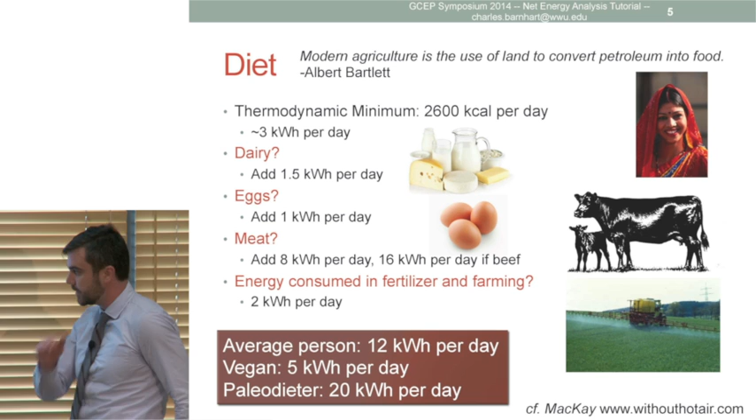That's a fair point. Energy consumed in fertilizing and farming is 2 kilowatt hours per day. That's the energy associated with the fertilizer and driving these vehicles around. And so if we look at the differences between a paleo dieter and a vegan, average person consumes 12 kilowatt hours per day. Vegan, at minimum, consumes 5 kilowatt hours per day. And a paleo dieter probably consumes somewhere around 20 kilowatt hours per day.

So for the paleo, are you still using the US numbers? I don't know what you mean by that question. The average vehicle miles are US. These food numbers are probably for an average developed country diet.

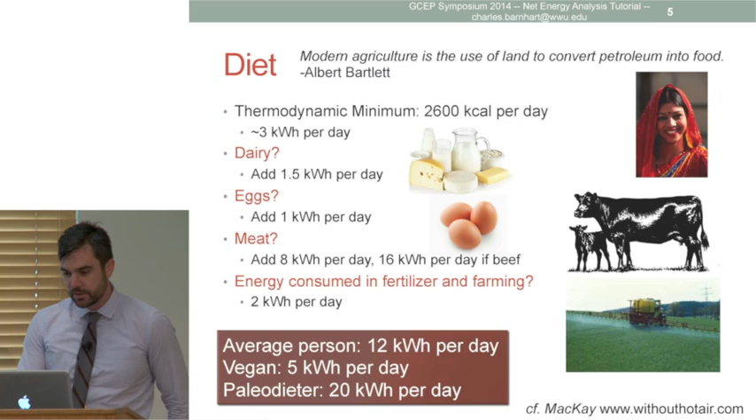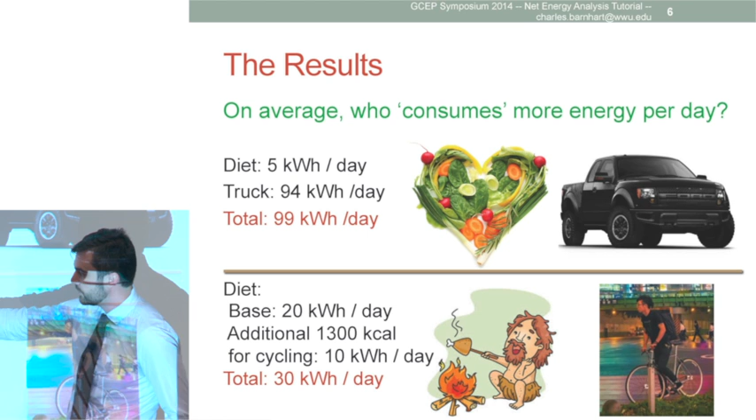All right, so here are the results. Diet for the vegan Raptor driver is 5 kilowatt hours per day. The truck consumes 94 kilowatt hours per day for a total of 99 kilowatt hours per day. The cyclist base for 2,600 calories consumes 20 kilowatt hours per day, but this individual is probably consuming an additional 1,300 calories per day to ride their bike. And so they need to consume more food energy, add another 10.

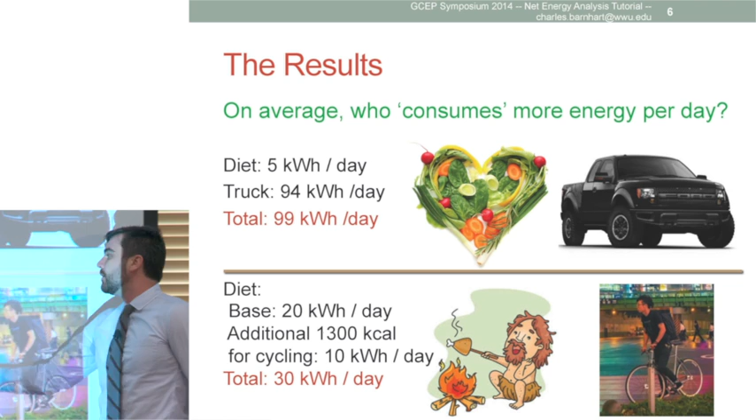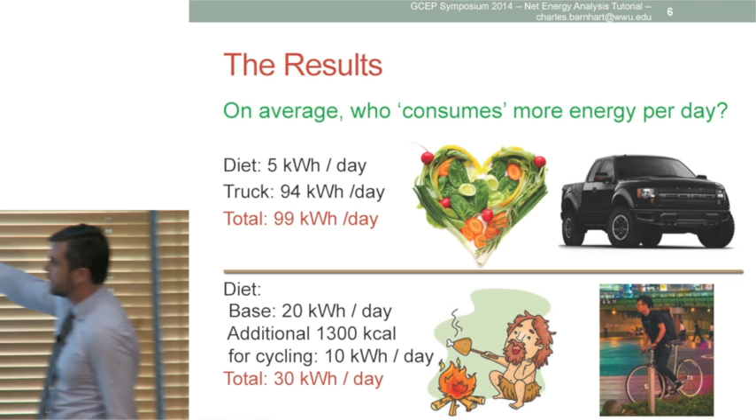Conclusion is the vegan with the Raptor probably consumes on a daily average basis more energy than the paleo diet cyclist. But these numbers are actually kind of close, and it is still in the maybe range, especially given all the caveats associated with life cycle assessment. But if I were to place my chips, I would definitely put it on this truck as consuming more energy than the energy associated with food.

Incidentally, you take one international flight a year, and you divide that through the 365 days, that's about 30 kilowatt hours per day. You take 2 international flights, and it's starting to wash over whatever car you drive. So you may be holier than thou and drive a very fuel efficient car, but be careful on how much you fly if you want to wear your Green Earth badge. I think a lot of people really need to consider that. Yeah.

All right, so we looked at transportation, we looked at diet. I want you to share with your neighbor and think about how else do we consume energy. So go ahead, break it up. I can take a break. Anybody want to share some ideas? Yeah. Go ahead. Yeah, I just want to hear some other ways we use energy besides transportation and food. Yeah. All right.

So my struggle with this one is, if I have money and I don't spend it on electricity or Hummers or cars or something, where does the money go? Most likely, my wife spends it on Amazon. Okay? So the carbon footprint of that money is more or less the same as what I would have spent on my electric bill or my car. And if I leave it in the bank, somebody else is going to spend it. Now it's a question of the velocity of money. How many times that money circulates through the economy? There's obviously the only way to be righteous about this is to be poor. That's it. Tutorial over. No, go ahead.

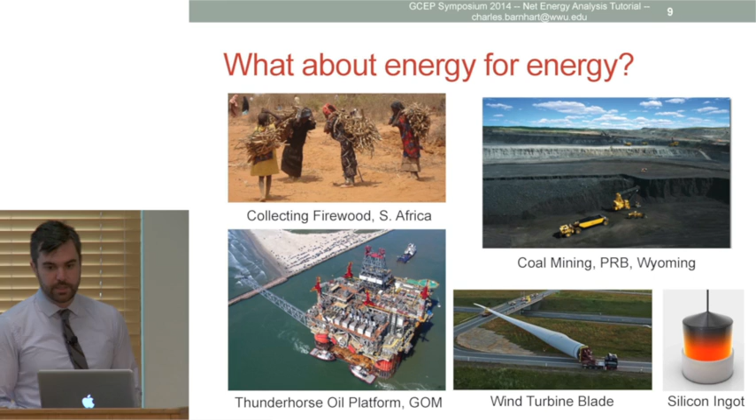It also takes energy to get energy in advanced industrial energy systems as well. So here are massive dragline operators mining coal in the Powder River Basin in Wyoming. This Thunderhorse oil platform is, I believe, the biggest oil platform in the world, and it is the size of a city. Here are a bunch of cars at the beach for scale. Wind turbine blades are massive and made out of fancy materials, and solar panels are made out of molten silicon, which is an energy-intensive process.

So this gets us to start thinking about what good is an energy system, what's good about it. Aristotle thought about what makes something good a long time ago. In the classic Philosophy 101 translation of Aristotle's functional argument, a hammer, a good hammer, is a hammer that drives in nails straight and true. And so a good energy system might be an energy system that delivers more energy to society than it costs society. And so that is the basis for net energy analysis. It's concerned with how much energy it takes to deliver energy back to society.

Some of the earliest thinking in this in a more formal sense, obviously humans have been thinking about net energy analysis on a daily basis since their existence. But in a more formal sense, Charlie Hall back in 1972 was thinking about the migration of different species, birds, reptiles, and fish. And he was wondering why fish in local streams on the East Coast were going up and down depending on different times of the year, and also depending on the size of the fish. And I'm not talking about salmon migration out to sea and then back to the stream. This is just within an individual stream.

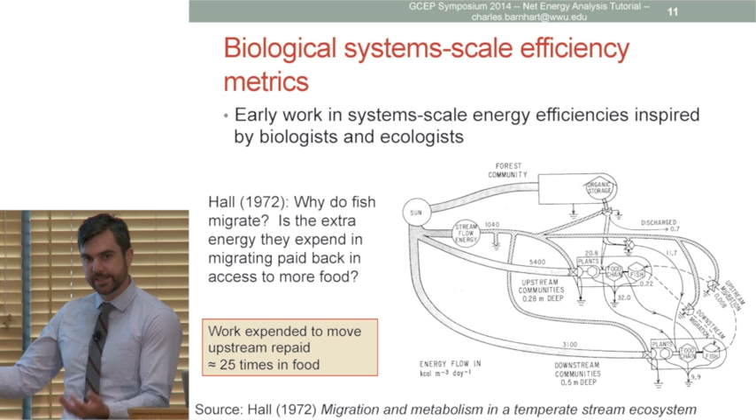So at certain times of the year, the fish would swim several kilometers upstream and hang out there for a while, and then later on swim several kilometers downstream. And he looked at several different hypotheses for why they would do this, predation, that sort of thing. And he determined that it's because depending on the season, the fish can get much more energy in different locations. And they end up getting 25 times more energy in food than they spent in all that swimming back and forth, especially upstream. So they can swim upstream, burn a bunch of calories doing that, but then they get repaid 25 times in food. And so the energy return for those fish is a factor of 25.

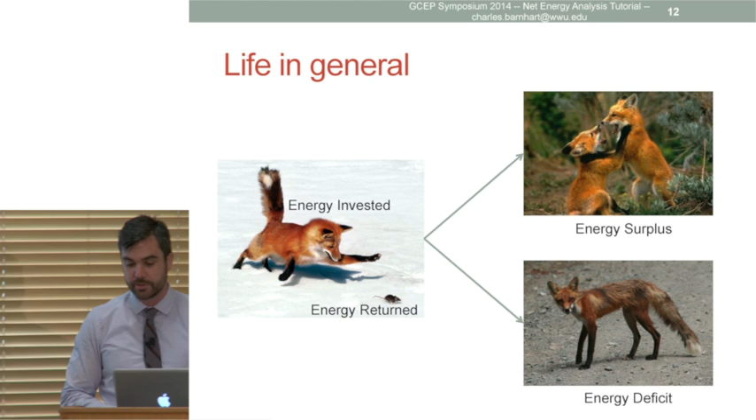Life in general is incredibly familiar with this. I mean, life is thermodynamically just a dissipative structure. We degrade energy gradients and create entropy. And to be able to continue to do that, we must acquire more energy than we consume. And so here's an Arctic fox spending energy, investing energy, trying to catch some energy. And if the fox gets more energy from the food than it spent trying to catch it, then it leads to great things in fox society like puppies. And if it spends more energy trying to catch the food than it gets from the food, then it leads to not so great things.

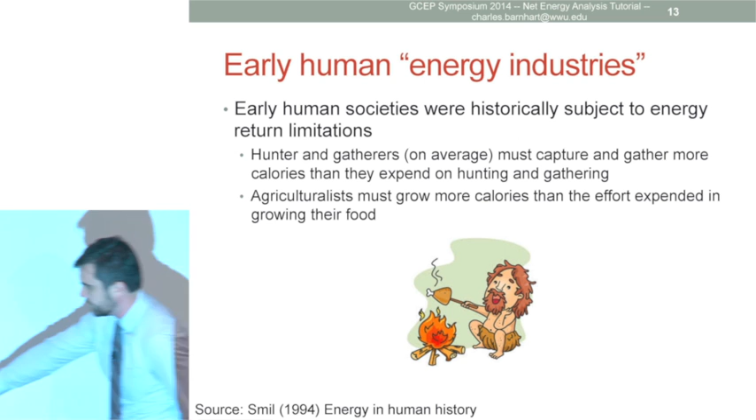All right, so I've talked a little bit about gathering firewood, but this is very familiar to energy use throughout human history. There's a really excellent book by Vaclav Smil called Energy in Human History. But in general, early human societies were subject to energy return limitations. Hunters and gatherers needed to maintain territories and capture more food calories than they expended going about that territory. There is an energy revolution. The first one was the use of agriculture. And so now we were able to grow even more calories than the effort expended in tilling those fields, because we begin to harvest solar energy in a sense.

I'm going to switch gears for a moment here. I know that there are a lot of business people in the audience, and so I wanted to shift away from physics momentarily and think about financial analysis and how it's actually guiding this net energy analysis. So here are some very basic concepts in financial analysis that even I barely understand. You have to invest money to make money. To be profitable, you need to make more money than you invest. Investments with high rates of return are better than investments with low rates of return. Investments that are profitable have a shorter break-even time, and they're easier to grow quickly. And so net energy analysis is applying these concepts.

And so in terms of net energy analysis, it takes energy to operate and decommission devices and systems needed to produce energy. For a device or system to be useful to the global energy system, not on some microscopic or local level, but globally, energy systems must produce more energy than they require for their manufacture and operation. And if this is the case, then they can bootstrap and grow, because this windmill will produce more energy than it took to build it, so you can use some of that excess energy, net energy, to build another windmill, and it can continue to take off.

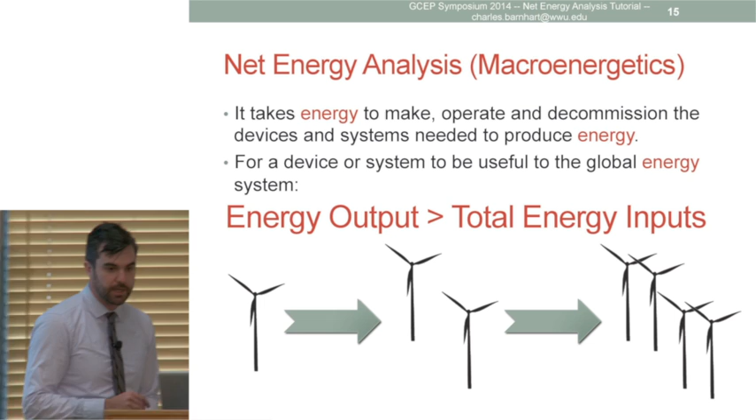Some general insights from net energy analysis. A primary energy resource must provide more energy to society than it consumes. Energy resources that do not meet this criterion are either subsidized by other energy industries or are uneconomic. So what does that mean, subsidized by other energy industries?

It wasn't last winter, but the winter before, in Nome, Alaska, there was a heating oil crisis. They got locked in by ice, and the delivery wasn't made before that ice reached there. And the United States employed a Russian icebreaker that was powered by 2 nuclear fission reactors. The amount of energy associated with obtaining that raw uranium, spinning it up, and then operating a fission reactor that's moving a massive boat at really slow speeds as it breaks through the ice to deliver some heating oil to a small village in northern Alaska.

The energy return on energy invested for that, the amount of energy contained in that oil compared to the amount of energy in that boat, it's probably far smaller. So their energy return was not a factor of 25 like for the salmon. It was probably like a factor of 1 over 1,000. So that is not a way to run a global energy system, but in that specific instant, that energy was precious. And so there are instances where poor energy returns make a lot of sense because humans are important.

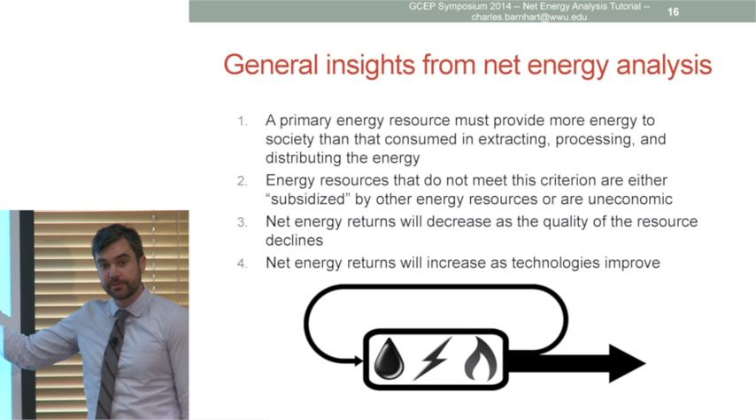What else? Here's some interesting insights that I think begin to unlock the power of net energy analysis. As resource quality declines, so does net energy availability.

Yes? I have a question about actual quality of the energy itself. It seems like the net balance could be negative if you're turning poor quality energy into higher quality usable energy. Yeah, energy quality is certainly important, and that's something that we keep careful track of in some of these later analyses that we are doing. Some of the early analyses just called a joule a joule, but as you will know, an electric joule or pure work joule is much more valuable and useful than some joules associated with a hot cup of coffee, for example. You can't run your computer on a hot cup of coffee.

All right, so I know it's gotten a little lecture-y and not as fun, but we are getting through some of these basic concepts with net energy. So the Industrial Revolution was fueled by easily accessible and cheap, abundant fossil fuels. This allowed for a rapid and large payback, and it led to something called the upward growth spiral. So there's so much net energy and excess energy associated with mining coal and then later oil that we could build these industries very rapidly, mine more coal, explore more oil, and the available net energy to society continued to outpace the energy required to supply energy to society. And so societal energy use went exponential in the last 200 years.

And historically, this energy sector has required very low energy investments, about 10% of the gross production. As we transition to renewables, or as oil resources become further degraded, this fractional investment will likely increase. This is represented in a cartoon here. So here's the energy sector, and it's pumping energy into society, but it requires some energy to maintain the sector or to grow it. And as these ratios change, depending on energy resource quality and technologies available, it has dramatic implications for societal economies.

All right, this is the most boring slide, but I have to pay respect to some of the people that did net energy analysis before I did. Namely, Peet in 1992 defined net energy very academically and said net energy analysis is a determination of the amount of primary energy, so that alludes to energy quality, direct and indirect, that is dissipated in producing a good or service and delivering it to the market.

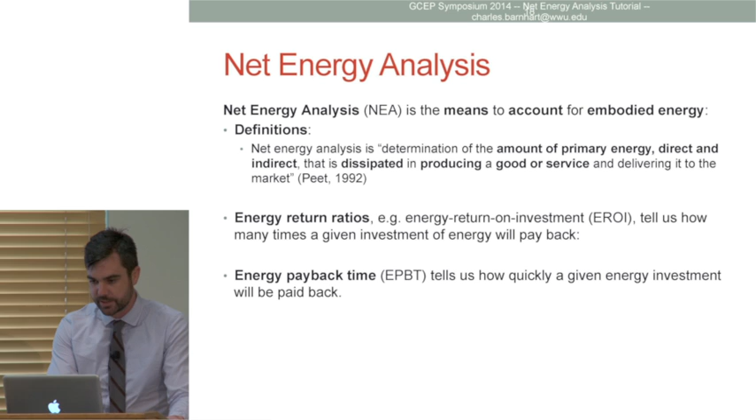The most commonly used metrics in net energy analysis are these energy return ratios. And so this looks at energy inputs, energy outputs. Sometimes this is time-based. They look at how these change over time. And that leads to another common energy return ratio, which is the energy payback time. It tells you how quickly a given energy investment will pay back its initial investment. So somebody asked about solar panels earlier. So this is a concern with paying back the energy required to manufacture a solar panel. So let's look at some of these returns.

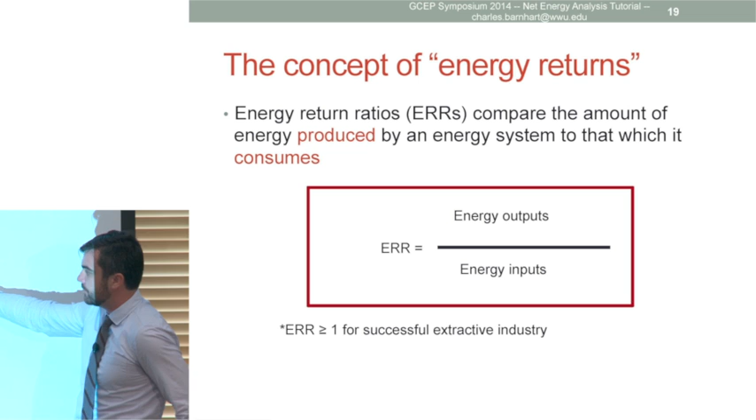So here's an energy return ratio, compares the amount of energy produced by a system to that which it consumes. So add up all the energy outputs and divide it by all the energy inputs as they're added up. And then basic concept, if this number is greater than 1, then that's a successful energy industry in a global sense.

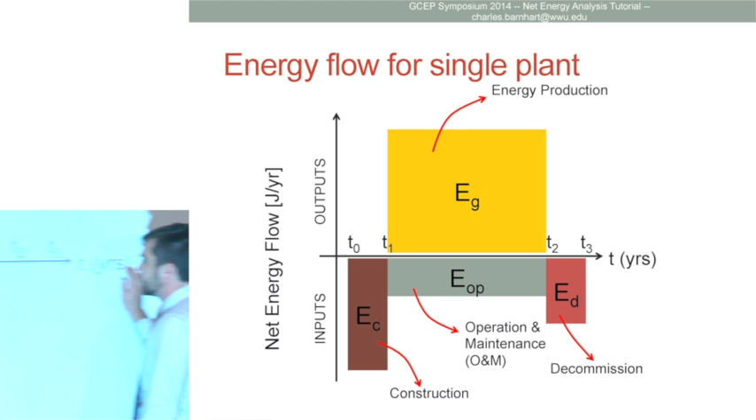So let's look at a single plant. We could call this a coal plant or a natural gas turbine, and that's where I'm drawing the boundaries, at the plant. Has energy inputs in construction. And so this is energy flows, so inputs and outputs, and this is a time axis here. So at the beginning of the plant's life, there's a big energy sink in building the plant.

While the plant's being operated, there's some energy associated with operating the plant, perhaps fueling it with coal or natural gas, and then it's generating energy to society. So that's energy production. And then at the end of life, there's energy associated with decommissioning and recycling the plant. And so the most common net energy analysis ratio found is this energy.

Yes, a question. I submit that your analysis isn't deep enough. Because in this whole discussion, we're assuming for a coal plant, for example, that the oxygen is free. Okay, and one of the outputs of the plant is CO2. Sure. Okay, and that's not reflected in this equation at all. And the problem is right now we're paying for the CO2, and we're going to continue to pay for this.

Yeah, so you're starting to get into external energy ratios or Earth system energy ratios. A complete analysis that includes all energy inputs, not just paid by society, but paid by planet Earth or the solar system or the entire universe, is always going to be less than 1. Well, yeah, so then we're starting to place an energy value on the oxygen and CO2. And that's certainly needed. These externalities need to be considered.

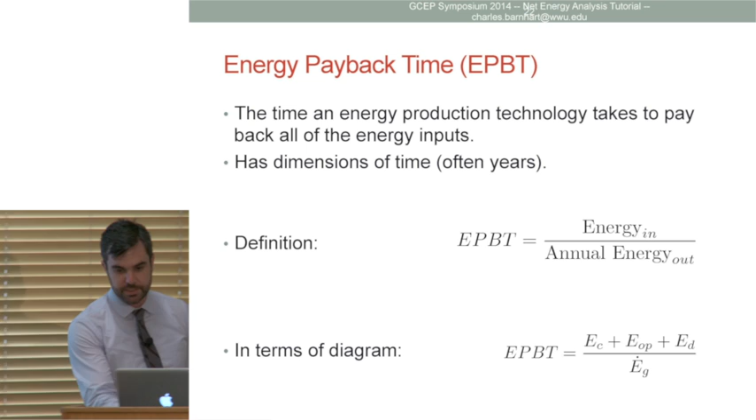So looking at a coal plant here, and this is from White and Kulcinski. So this isn't actually looking at the fuel inputs, it's just looking at the operational costs of the plant. Here are the energy inputs for construction, operation, and decommissioning. And here's the energy generated over time. Here, the construction is 150 terajoules, operation is 83 petajoules, decommissioning is 20 terajoules.

So we can first look at the energy return on energy invested for this plant. And so we put in the energy generated on the top and all the energy inputs on the bottom. So we can plug those numbers in. Does anybody catch a math error with this equation? Yeah, somebody said it, petajoules and terajoules. So in energy analysis, it's really important to pay attention to units.

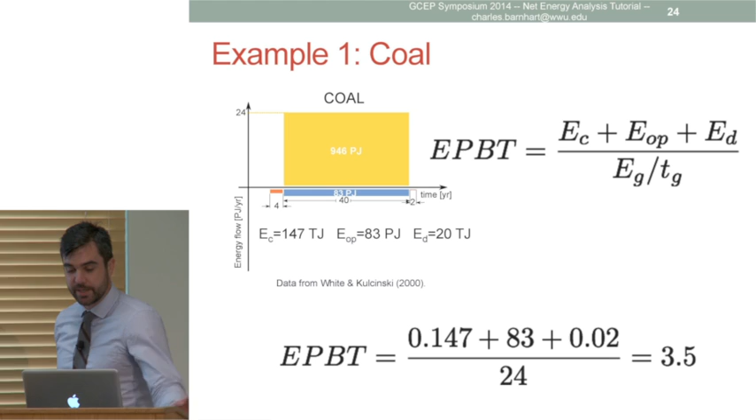In general, you guys have already alluded to this with energy quality. That's an even deeper dive into what units mean. But in basic terms, I've confused petajoules and terajoules here. And so we can correct for that. And the EROI for this particular coal plant is 11 to 1. In terms of energy payback time, take the energy inputs and divide it by the energy generated per year, and it has an energy payback time of 3.5 years.

So in general, non-renewable technologies have large operating and maintenance costs associated with the fuel cycle. Renewable technologies often have large upfront costs and minimal operational costs.

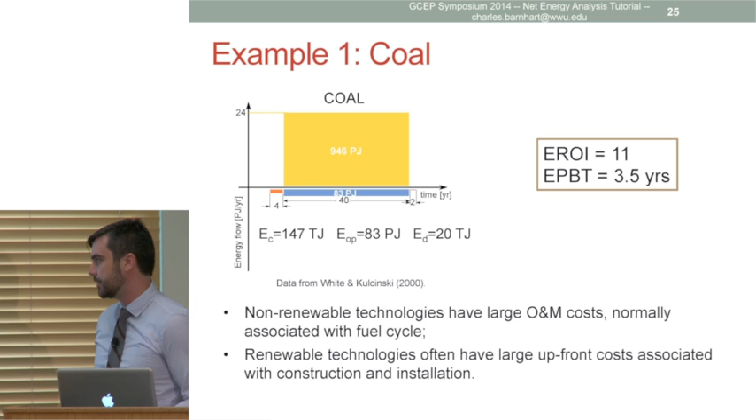The fossil fuel technologies are often described as pay-as-you-go, and the renewable technologies are pay-up-front. All right, that was a lot of lecture, so let's break it up a little bit. And just in terms of societal energy costs as determined by economists today, I want you to take a vote on which resource on average today has the highest energy return on energy invested. We can go back to that website, I hope.

On average over what time period? Today. So I'm not talking about oil gushing out of the ground in the 30s. I'm talking about oil today, coal today, solar today. Solar post-2000, that's where the data is coming from. Wind post-2000.

Yeah, so again, this is who you send the message to, and this is the message. Yeah, so we're starting to get some maybes. We're starting to get some distribution in the results. Does anybody have an idea why solar PV might not have as many votes as some of the other technologies? It's just energy intensive to make. Yeah, it takes a lot of energy to melt those silicon wafers.

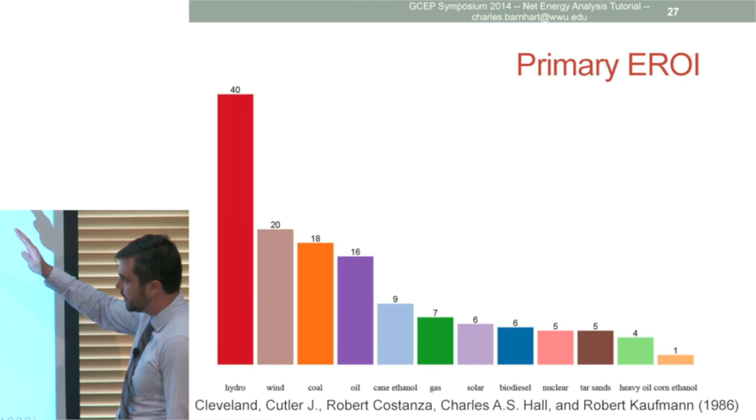All right, so this looks pretty good. We have a good distribution, some high votes for oil, natural gas, and wind. One more for natural gas. So natural gas is actually an interesting thing because the energy associated with natural gas production's changed dramatically in the last 10 years with the advent of horizontal drilling and fracking, and so these numbers aren't reflected as well in this plot, which comes from previous work back in 1986. But hydro wasn't on that chart. But in general, wind, coal, and oil are very high, and solar is lower than wind by a fair bit. I have some updated numbers on solar, wind, and gas that I'll display later.

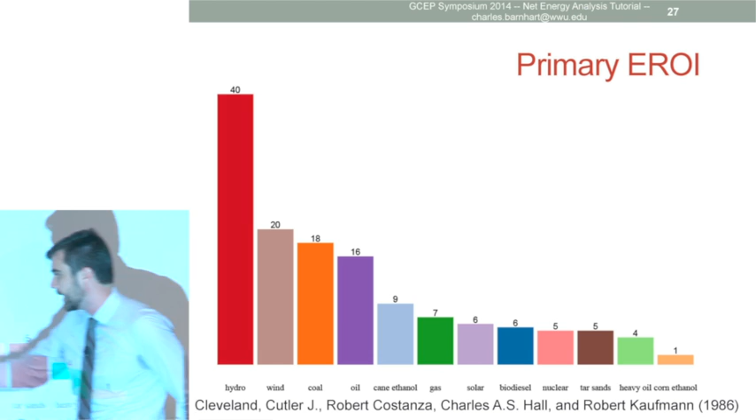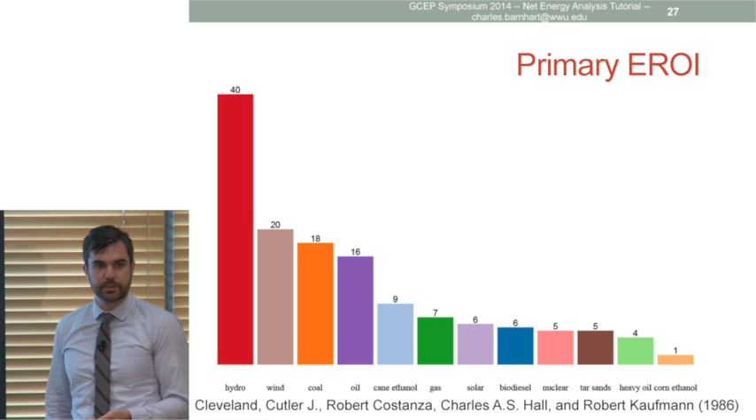Corn ethanol, depending on where it's grown, can sometimes be below 1. Yeah. Hydro performs so well because it has a huge upfront energetic cost to build the dam, but then it just runs for 100 years and continues to pay energy back.

All right, so we've already explored a lot of this, but just in case we're not all on the same page, I want you to share with one another. Yeah, go ahead before we do this. The analysis you did, like the example of the coal plant for the energy return on investment, I think you mentioned that the coal used to feed the plant is not considered in that calculation. Is that correct? No, it wasn't. This is like comparing a solar power plant to a coal-fired power plant based on EROI. It doesn't make sense to me because on one hand you're feeding something, a bunch of coal pulled out of the ground, and on the other hand you're just sitting outside on a sunny day.

So the energy associated with pulling the coal out of the ground was included. The energy contained in the coal was not included. But this is certainly getting into some of the issues and problems associated with this. It really depends on where the boundaries are being drawn, and it's difficult to think of how to compare something like a coal-powered plant to a solar-powered plant. And so one metric that I think is useful is the net external energy ratio, which only looks at energy subsidies paid by society, energy paid by society to acquire these different resources.

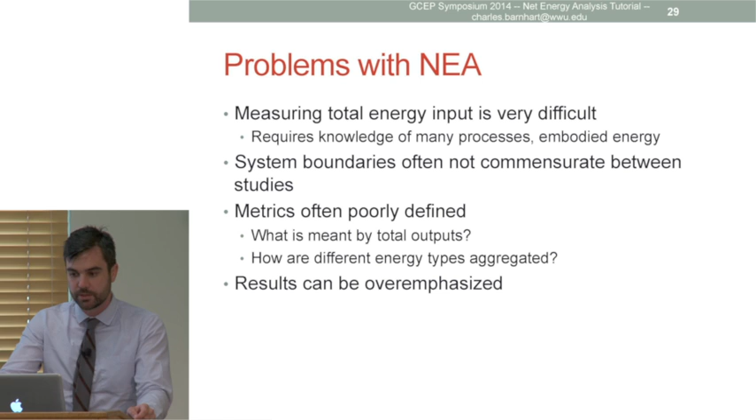I saw someone with their hand up. Yes? Do you use a discount factor for calculating? No, energy is conserved. I don't like that idea. But some people are definitely interested in that. But personally, I get really queasy when we talk about less energy in the future because there's always the same amount of energy. Exergy, you could talk about discounting exergy.

All right, so these definitions are really simple, right? Just an equation with a few numbers in it. It's 4th grade mathematics, but the implementation and execution of net energy analysis is very complicated, as we're beginning to discover. It's easy to talk about. It's difficult to actually collect the data and perform the math. Energy products are produced in very complex pathways. I mean, we're talking about truckers and Snicker bars.

Indirect energy consumption can occur in many different industries. How much energy does it take to make a PhD to seismically analyze an oil reservoir? Do we have to include all the energy it took to train that geophysicist? And so Adam Brandt here at Stanford, McDale at Clemson, and myself are trying to standardize some of these methodologies, but right now it is a bit of a hornet's nest. We have something like 20 different operational definitions in one paper.

Matt Pellow, a postdoc at GCEP, is looking at energy analysis associated with fuel cells, which are really complicated because is it an energy generation technology? Is it a storage technology? Is it a consuming technology? So it's a complex thing, but we are working on it, and I think it has a lot of promise and can really add to policy debate in the future when we're looking at carbon costs, water costs, energy costs, as well as financial costs. We're going to take a short break, and then we're going to look at 3 examples.

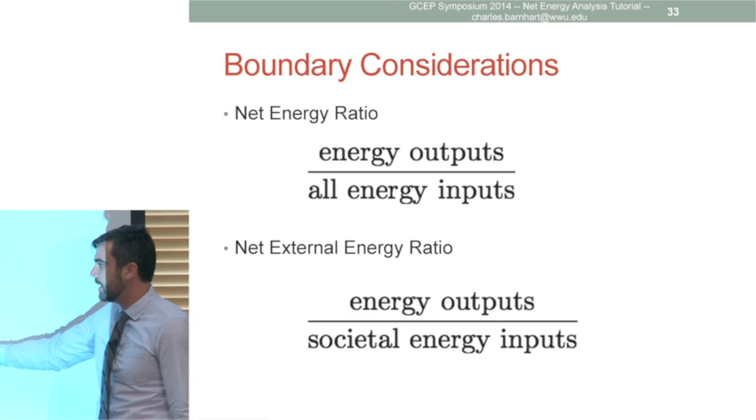This external energy ratio has more economic significance because it's asking how much energy was actually shipped to Alberta to produce these resources. Any guess which one is going to be bigger? Is all of the energy inputs going to be bigger or smaller than the societal energy inputs? So all the energy inputs are clearly going to be bigger because this is energy on site, which means this denominator is going to be bigger, which means this ratio should be smaller.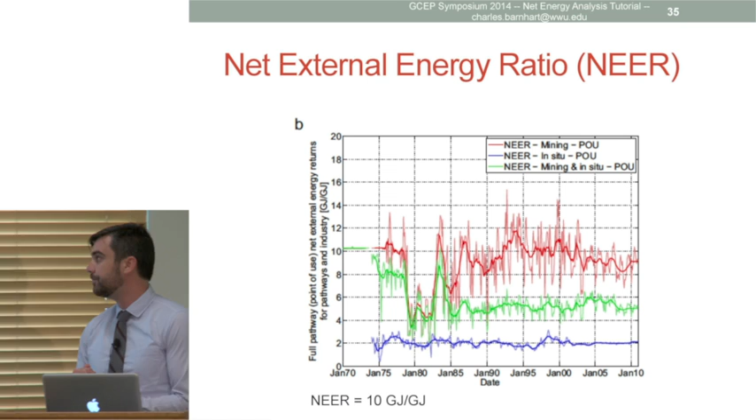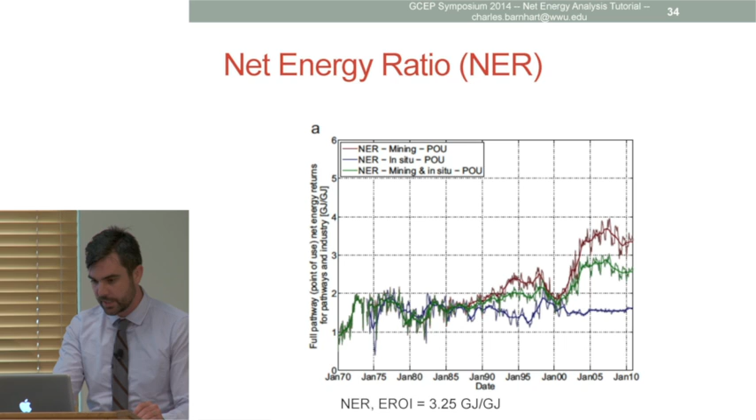But the EROI for these tar sands at point of use are about 3.25. If we look at their EROI with respect to cost to society, the net external energy ratio, then the EROI is about 10. And that's because it's consuming some energy on site. They did see slight improvements in this one as technologies and mining practices have improved. In the long run, these EROIs are expected to go down as the resource becomes depleted and less accessible. The low-hanging fruit gets picked. And it's getting really low with oil price depreciation happening in the last 2 weeks.

Here's the PV industry. So this analysis was done by Mick Dale. He's really interested in not just static EROI values, but how EROI changes with time, or more dynamic things. When industries are in a subsidy period or when they're in a producing period and how that transition happens. So these are all his words, and he states that amortized metrics such as cumulative energy demand, so that's the total energy spent in a particular technology pathway, may disguise the cost of rapid scale-up or the cost of transitioning from one energy source to another.

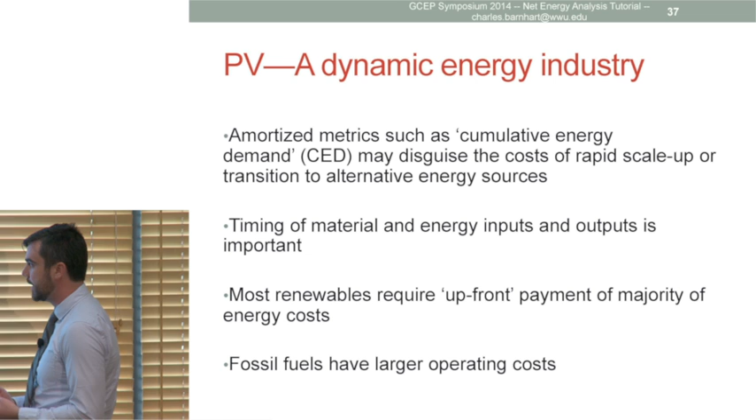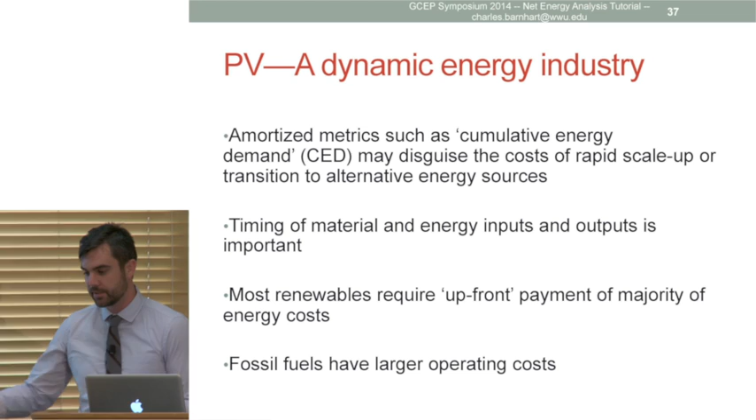The timing of material and energy inputs is important. So this is reflecting that pay-as-you-go model with fossil fuels versus the pay-up-front model with renewable resources. So to state that again, renewables require this upfront payment. All the energy and financial capital is paid at once, and then it pays its dividends over time, whereas fossil fuels, in an energetic sense, require less upfront energy costs, but then they require continued energy payments during their operation.

But you mentioned at the bottom, the fossil fuels have larger operating costs. That's very broad. These are Mick's words. I'm assuming he's talking about energy, larger operating energy costs. You have to forgive Mick and I, we're physicists, so when we talk about costs, we're usually talking about joules. But here I'm trying to separate this distinction, this problem with cost. So here is financial costs.

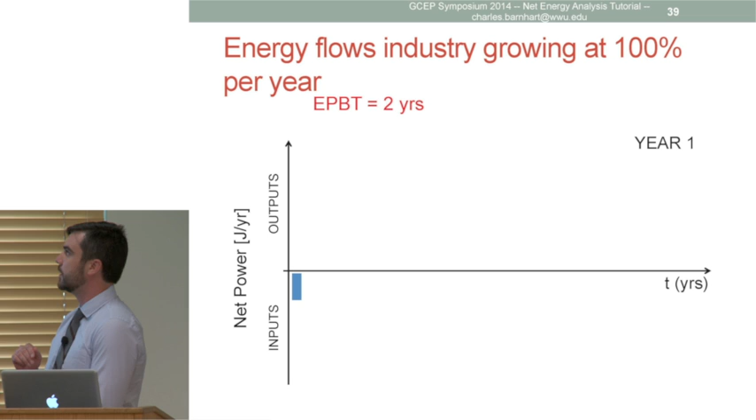So here, energy flows. So this is what Mick's getting at. He's not looking at the total EROI at the end of the day or 30 years down the road. He's concerned with dynamic EROI over time. And so he drew up this nice cartoon to show some of this. So this is the industry flows associated with a growing industry. This is just a cartoon. These aren't actual values yet. So your energy inputs on year one, some energy is paid by society to build a solar panel.

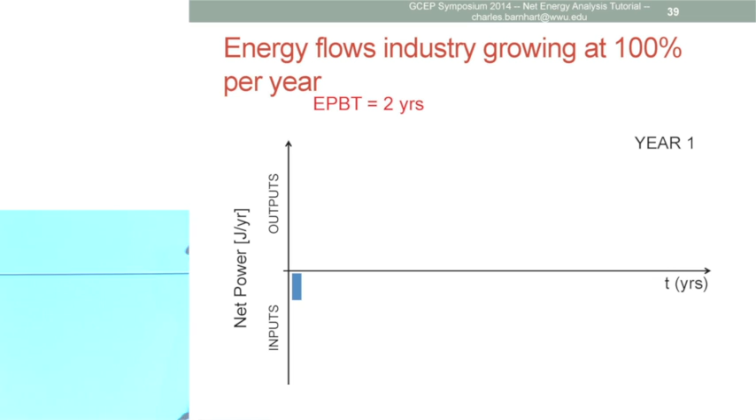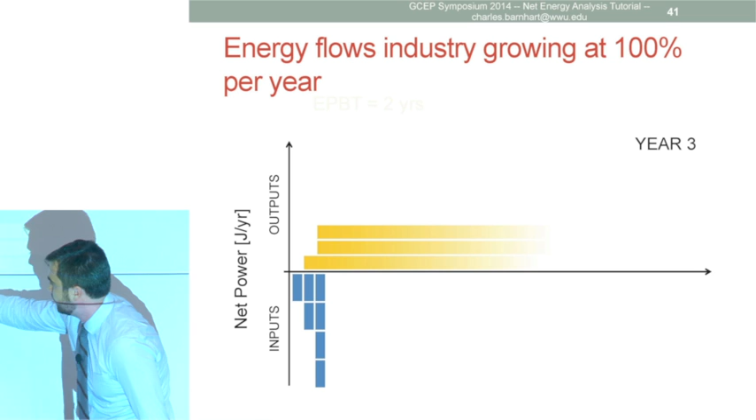Year two, an additional energy unit is paid. This first one is now starting to produce electricity. Year three, society decides to build two more solar panels. These first three here are now producing electricity. And so on.

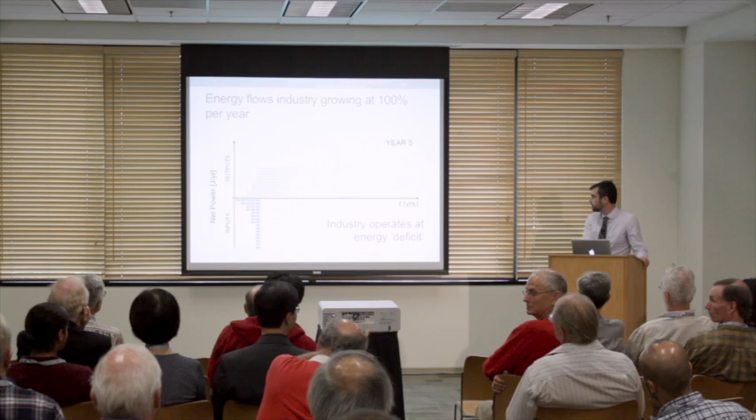And in this specific case, the industry is operating in a deficit. Each year, society is paying more energy out than it's getting back from those solar panels on a yearly basis. Just to clarify this, let's stop right there making any more investments and just use what we have. Wouldn't we get net return in a few time units?

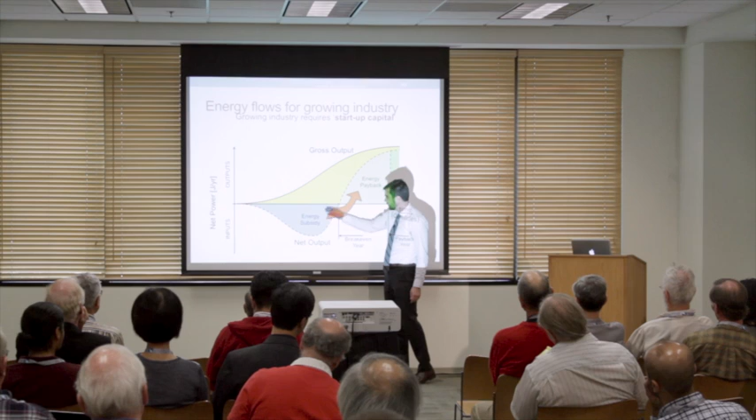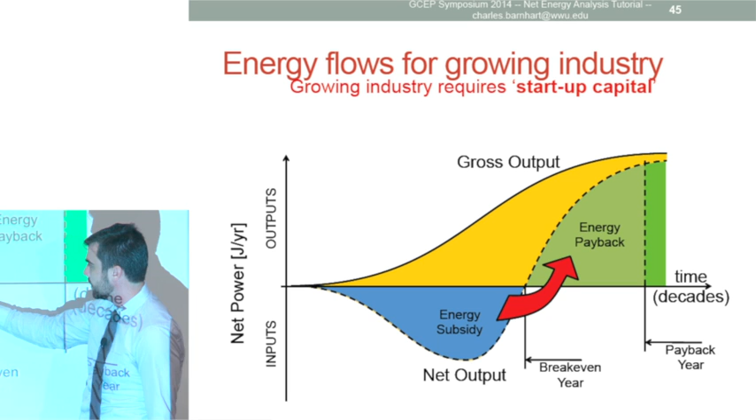Yep, that's exactly right. So at this point, society has decided to not invest any more energy, or to invest decreasing amounts of energy in a time derivative sense into the solar panel industry. But these ones that have been built all along are now generating electricity and will continue to do so. At some point, the amount of energy produced is going to equal the energy subsidy, and that's going to be this break-even year. And after that, we'll continue to pay energy back.

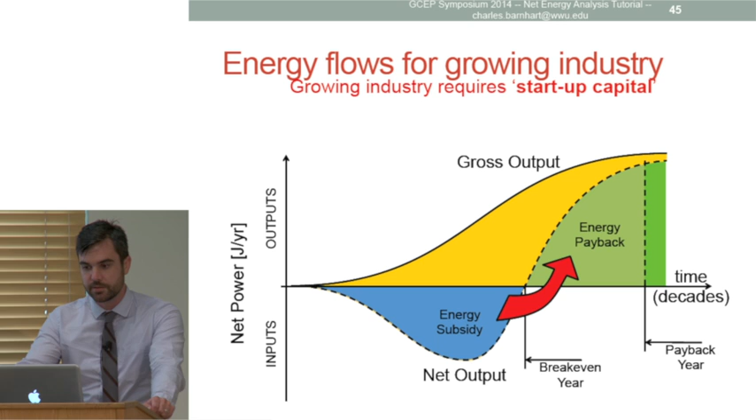The question with respect to the PV market is has it reached that break-even year? Or is society paying an energy deficit to provide energy to build the PV panels? And a related issue is that if you increase your PV penetration or any renewable beyond about 10%, you have to start worrying about issues of how you're going to integrate it. Yep, and you're going to increase your energy cost by building peaker plants and storage.

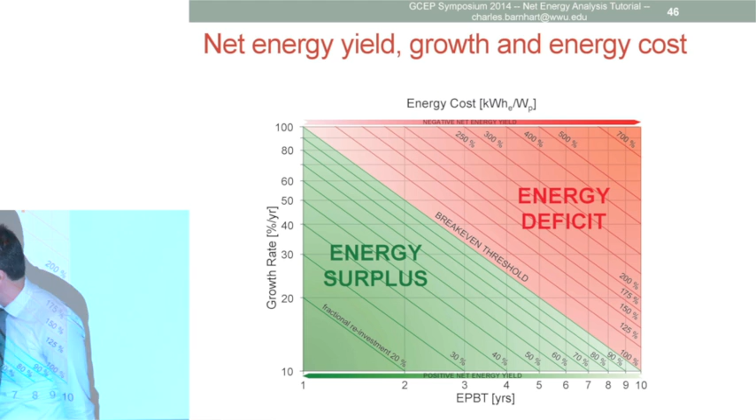We'll get to that. So here's the net energy yield growth and energy costs associated with the PV industry. This plot shows the growth rate of the industry on the y-axis, percent per year, and this x-axis shows the energy payback time in years. Energy payback time is linearly proportional with the energy cost in kilowatt hours per watt peak. And so to begin to plot technologies on this graph here, we need to have 3 different numbers. We need to know what the industry growth rate is, percent over time.

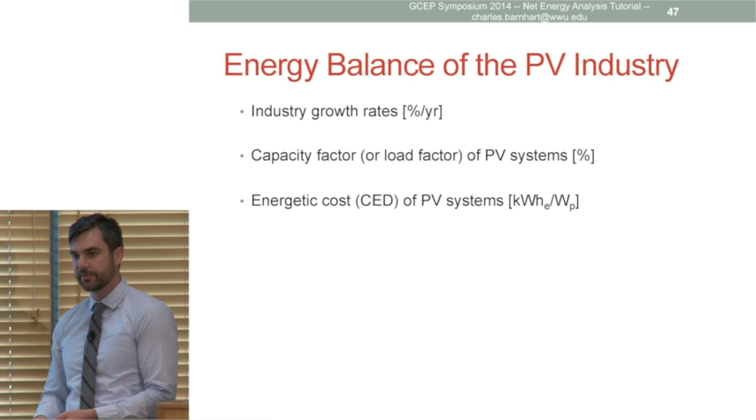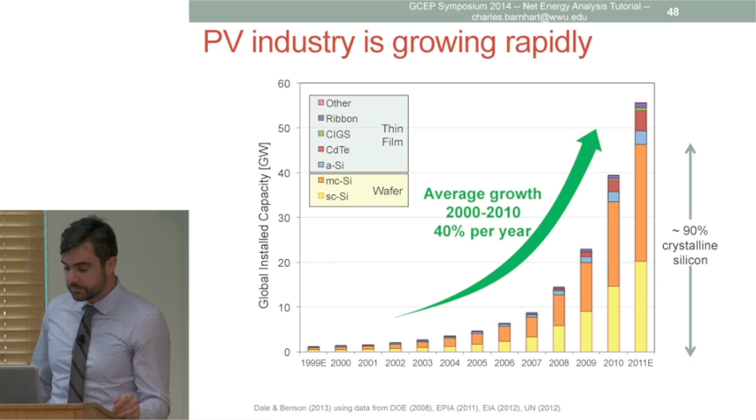We need to know the capacity factor of these PV systems, because the energy cost is kilowatt hours of energy paid per watt peak, but they don't always deliver at watt peak. They deliver at some capacity factor of watt peak. And we need to know the energy cost. So the PV industry is growing rapidly. Average growth between 2000 and 2010 was 40% per year. Most of that is crystalline silicon. Global capacity factors, the median is about 11.5. That's because of the tremendous PV penetration in northern locations, mainly Germany.

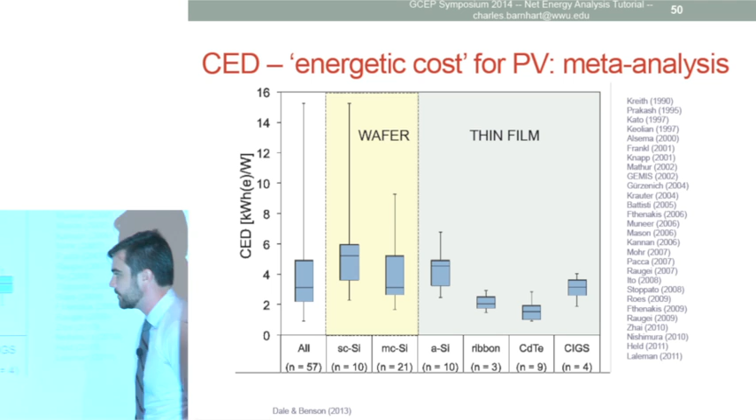And the third number we need is the energetic cost for PV. Mick conducted a meta-analysis. He consulted several different studies, and he found the energy in kilowatt hours per watt peak is technology dependent, and is around between 3 and 5 or so for crystalline silicon. Energy costs are decreasing with time as people get better and better at making solar panels. This is called technological learning, and this proves true in most all industries, including the PV industry, and it's reducing the energetic cost of PV technologies.

So because of that reduced cost over time, this again is that plot with growth rate and energy payback time, which is proportional to energetic cost here. So this is 2012, so I don't know what this is. This is 2000 or something for one particular technology, CdTe. So in the year 2000, the growth rate for CdTe was 10 or so, and the energy cost was 5 kilowatt hours per watt peak. A year later, energy costs reduced, but growth rate increased.

Trend continued. The growth rate became so excessive in 2010 that there was actually an energy deficit. That's because society was building so many of these panels, they weren't paying back the energy yet. But as costs continued to go down, energetic costs and growth rates slightly reduced, CdTe is now in the energy surplus region. It's delivering more energy to society today than society paid for it, and it will continue to do that over time, assuming these growth rates stay similar, because the ones that were built yesteryear will now be producing energy.

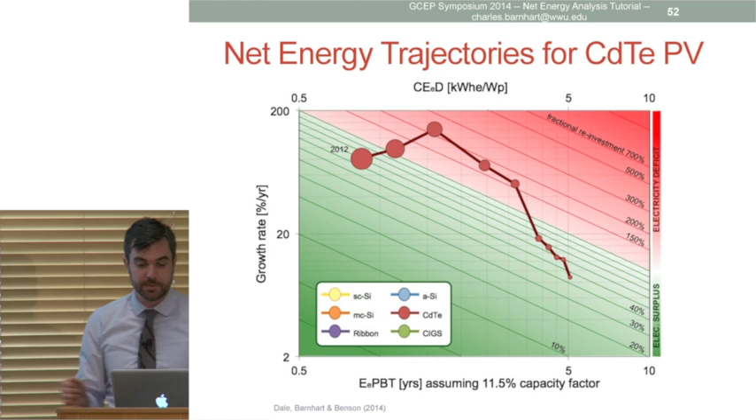Yeah, Mark. So one of the things about this is this almost connotation that a brief energy payback time is a good thing, and yet I would think if you invented the greatest energy technology today, not an infinitely great one, but a practically really great one, we would spend a huge amount of energy transforming the world's energy system. Yeah, that's what we're doing with fusion. We've paid so much energy into that.

But it's an excellent point. And I think both numbers are important. The EROI, the static one, over the course of the energy technology or resource, and this dynamic one is important in terms of.

It starts getting kind of philosophical. If society has more net energy, it can do things besides the energy industry. We can have arts and philosophy and things like that. But, and so this is looking at, I think Mick's emphasis here is the solar industry impinging on energy availability today? Clearly it will deliver more energy down the road because it has an EROI above 1. But your point is absolutely true. If there's a technology with an exceptional EROI, then we should pursue it for the sake of our children or something.

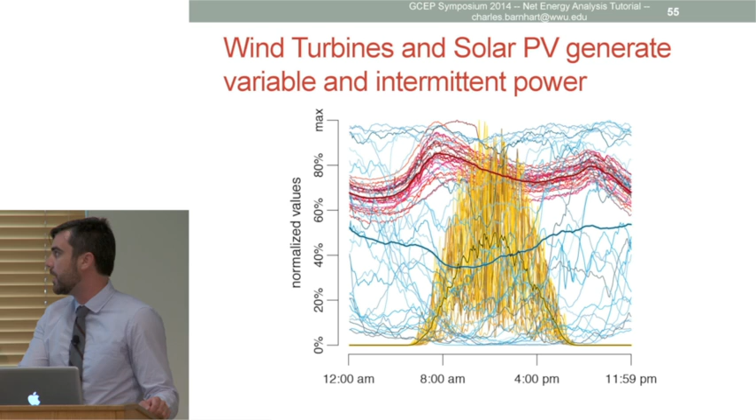So here are 30 days of wind generation in blue, solar insolation in gold, and power demand in red, superimposed on each other. This is a pretty common plot nowadays, but it just shows that power supply from renewable resources does not correlate with power demand. And so necessarily, as the penetration of renewable resources increases, we need to develop more flexible technologies on the power grid.

And we can do this in several different ways. We can improve forecasting, determine when the sun is going to shine and when the wind is going to blow, and deploy resources as needed before the problem becomes apparent. We can increase aggregation, begin to share electrical resources with neighboring communities. We can deploy flexible dispatchable generation. So modern aeroderivative natural gas plants operate just like an airplane turbine, they can speed up, they can slow down, so they can adjust the amount of power they're delivering to the grid as needed.

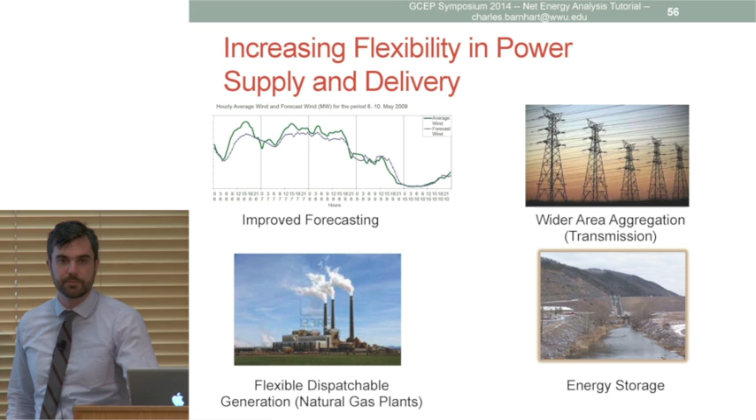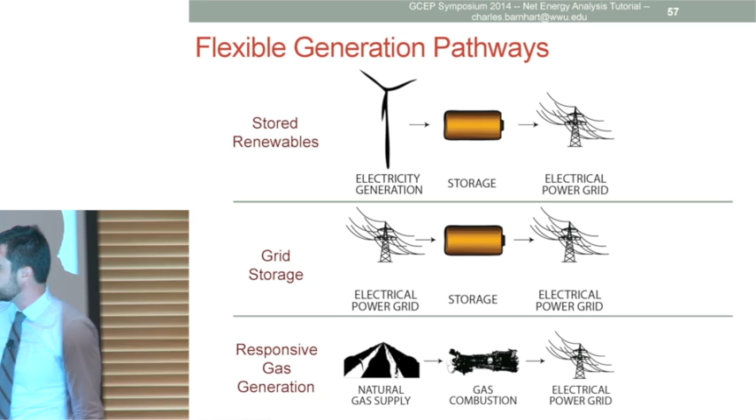Or we could deploy energy storage, which acts as flexibility in two ways. It can be an energy sink, and it can be a source of electrical energy for the power grid. So in my net energy analysis, I explored 3 different flexible generation pathways. Stored renewables, so electricity generated from a windmill at night, for example, charges storage, and then when it's needed the next day, it can be dispatched to the power grid. Another pathway is grid storage, so here electrons are taken from the grid, put into energy storage, and then dispatched back to the power grid.

To clarify, the electrons that went on the grid and grid storage came from where? They had to come from some source. I assume grid average source, and that's going to be regionally specific, and in this analysis I looked at US average grid. And then responsive gas generation takes natural gas from the gas network and runs it through a turbine generating electricity. So the question I was concerned with, how do these 3 different pathways compare to one another on an energetic and a carbon intensity basis?

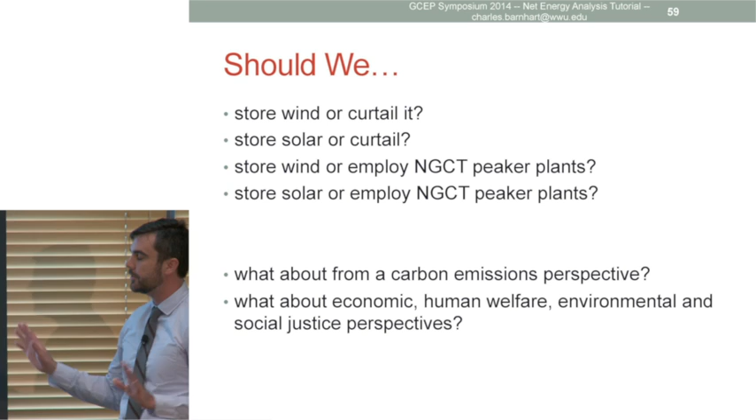Well, here's a little formative assessment to see what you guys think about it before I go into the analysis. No internet polls anymore, we're running out of time. Should we store wind? Let's do thumbs up, thumbs down. Thumbs up for storing wind, or thumbs down for curtailing it. Most people think we should store it. Few thumbs down. Obviously, it's going to depend on technology, all sorts of other things. What about storing solar or curtailing it? Store solar. Should we store wind energy, or should we use natural gas peaker plants?

Both. So you're saying the world's a complex place and we can't just do one or another, and I've created a false dichotomy? Good. Let's just get into the analysis. All right, so the methodology, I mainly focused on developing a theoretical framework to perform this analysis because it didn't exist yet, and also because the data is poor. The CO2 data is quite good. The energy data is in want.

So I looked at energy storage and energy generation life cycle assessment studies, both in energy and carbon. As best I could, I tried to truncate all the analysis to cradle to gate. So this boundary is drawn as soon as electricity leaves the device. I don't care what's happening once it enters back to the power grid.

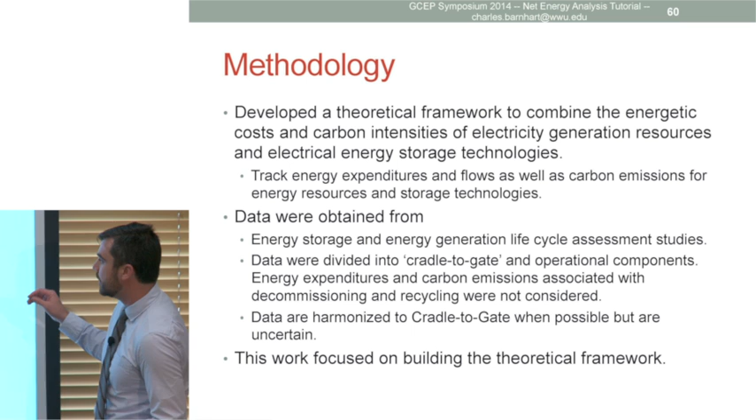And in terms of batteries, cradle to gate means as soon as the battery was manufactured at a factory. I'm not considering the energy it took to be transported somewhere. And so this is the gate in which whatever I'm looking at is being handed from the producer to the user. This is getting a little weedy.

Okay. Grid scale technologies, there's a lot that were talked about in the previous technical session. Technology is improving rapidly. I have no doubt that we'll see some really impressive stuff 10 years from now. I only looked at technologies that are available today, and first and foremost, to be used on the grid, it needs to be safe. People don't like it when electrical systems kill them. So they need to be safe. Next, they need to be cheap.

They need to be economically viable, and to be economically viable, they usually are made from abundant materials, have high cycle life, and they don't waste a lot of energy, so they have high round-trip efficiency. None of these technologies satisfy all of these criteria, except for the safe one, but most of these technologies satisfy a few of these. And so traditional lead-acid batteries, like you might find in a car, sodium-sulfur batteries, flow batteries, compressed air energy storage, and pumped hydroelectric are geologic storage technologies.

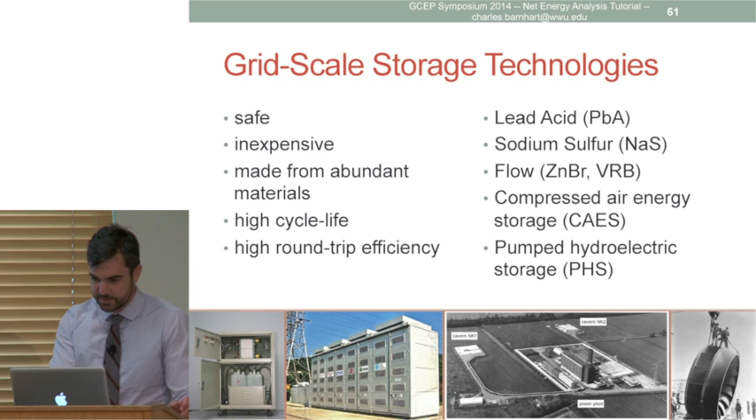So one of the first simple analyses that Sally Benson and I did was we tried to find an equivalent ratio to the energy returned on energy invested that encapsulated a lot of these important storage parameters, things like cycle life, depth of discharge, and efficiency. And so this is the energy stored on energy invested. It's the total amount of energy stored by a storage technology over its entire lifetime divided by the cradle to gate energetic costs. And as you can see, there's a big difference between geologic storage technologies and electrochemical storage technologies.

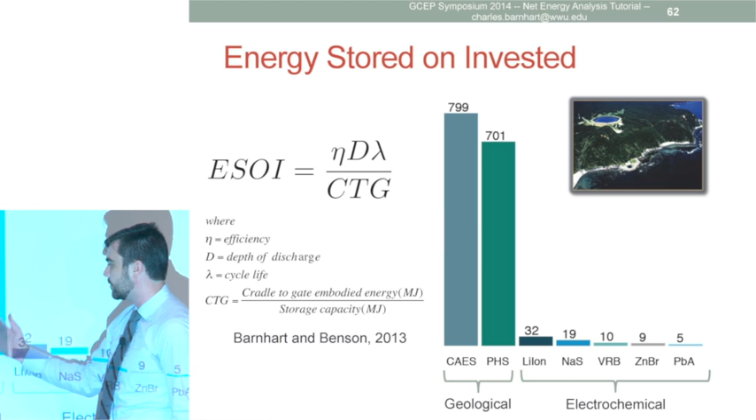This is primarily due to two reasons. The cradle to gate energetic costs are lower for these because they're either a hole in the ground or a hole in a salt dome. No complex materials or chemistries involved with that. The second reason is they have really high cycle life values. So a hole in the ground or a hole in the salt dome lasts for 25,000 cycles.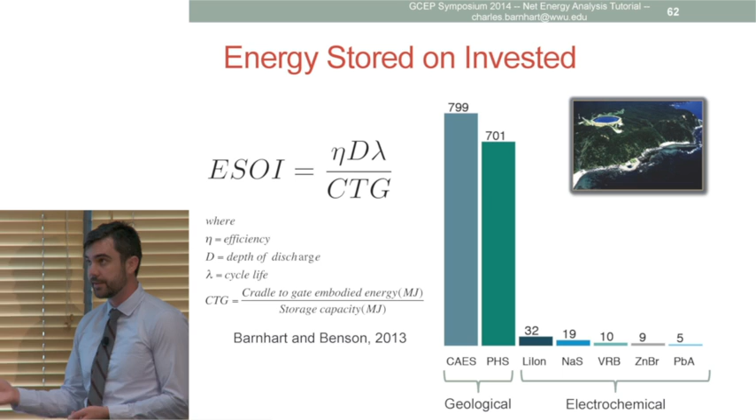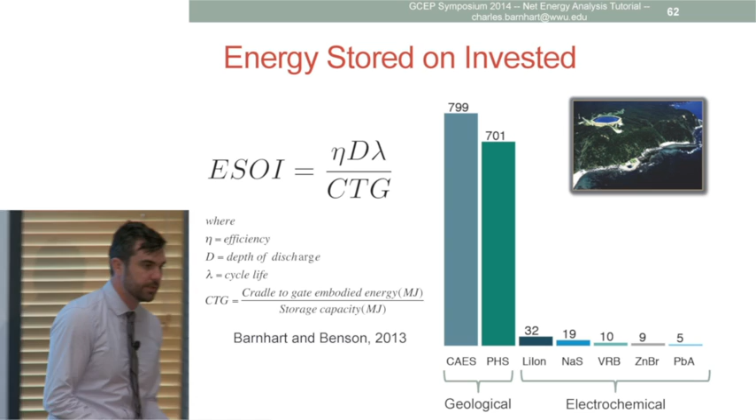Whereas electrochemical storage technologies suffer from much shorter cycle lives, between about 200 and 1,000, or 10,000, depending on the technology. I see a lot of room for improvement with cycle life counts for electrochemical storage technology. So I'm not saying that we should totally ditch them. I'm just saying today, as it stands, pumped hydro is a much better option from an energetic perspective.

Yeah? Remember the number of the CAES technologies that were used actually use a natural gas-fired generator. They work in a single cycle rather than combined cycle. Yeah. Whereas energy efficiency actually is pretty awful. Yeah, so I looked at the AC-AC efficiency, electrons in versus electrons out. In this efficiency, I did not consider the energy costs of the gas itself. So there's actually two efficiency values. There's actually like 4 efficiency values for CAES measurements. It's a tricky beast.

That being said, natural gas is consumed with CAES operation, and so even though it has great energetic performance, it has very high CO2 emissions associated with its operations. Natural gas needs to be burned as the air exits the cavern because of the ideal gas law. Pressure goes down, so temperature goes down, and ice on a turbine blade is a horrible thing.

Yes, lead acid has high CO2 costs associated with it because they don't last very long. The traditional lead acid batteries don't last long, and so they need to be replaced often. And even taking into account lead recycling, the energy costs and CO2 associated with it is high. And this was all studies conducted over in Argonne National Laboratories.

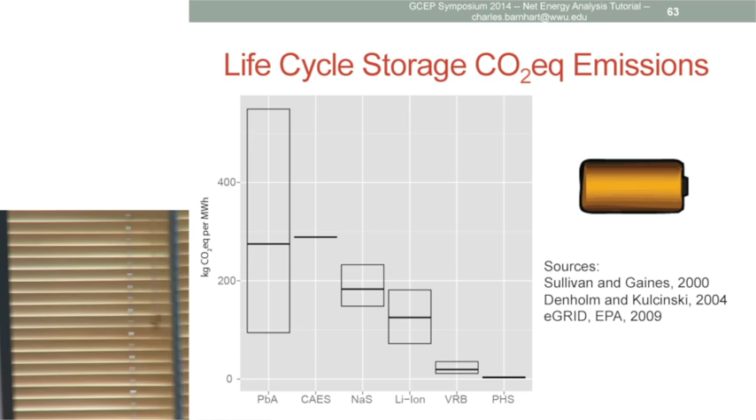An important thing about energy storage is they aren't perfectly efficient. Energy is wasted, and so that will increase the amount of carbon associated with the energy resource that charged the storage in the first place. So it's something I call a source carbon multiplier, which is 1 over the efficiency of the technology. So to deliver 1 megawatt hour from a lead acid battery, you need to put 1.11 megawatt hours into it because it's not perfectly efficient. That's going to increase the carbon intensity of whatever charged that battery.

How can the compressed air energy storage be greater than 1? Because this is the AC efficiency. I put in 100 electrons. I actually got 136 out because the natural gas combustion spun that turbine even faster than it normally would have from the air.

Basically. Carbon burden from the consumption of the methane and the natural gas in your carbon multiplier? Because you're burning methane. Yeah, so I do that. I'll show you the equations shortly.

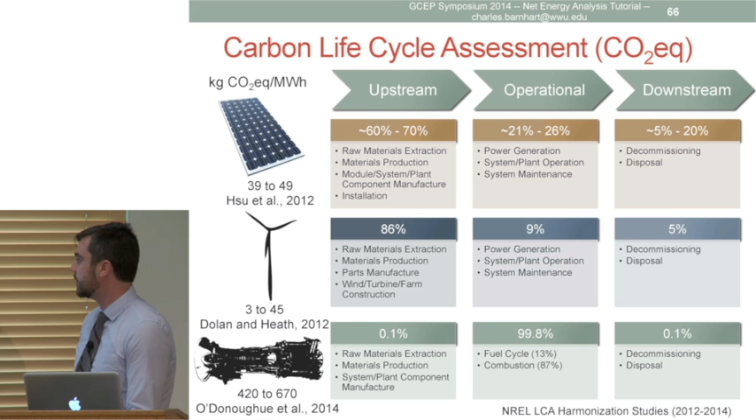So we have the energy data, we have the carbon data. We can start combining these with some math. So to get the energy return on energy invested for one of these flexible generation pathways, this one in particular, I have to look at the energy return. So the solar panel puts phi units of energy into storage, only eta phi come out because storage isn't perfectly efficient. So the energy return to the power grid is eta phi. The energy costs are the energy intensity of the resource plus the energy intensity of the storage technology. I don't have time to explore what those mean. We can talk about it later. So energy output over energy inputs is this.

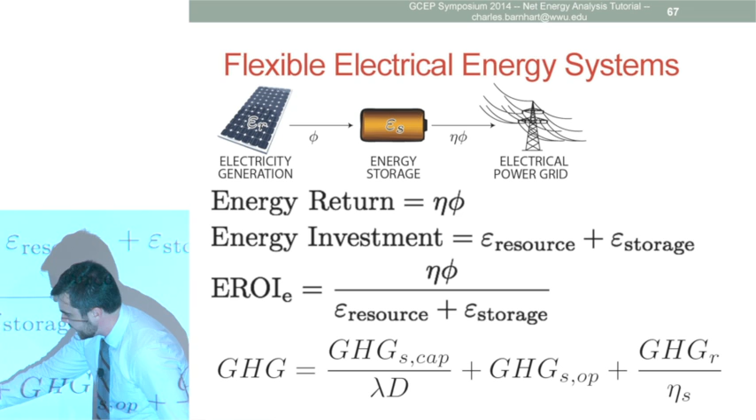And then the greenhouse gases associated with this are the per cycle greenhouse gases associated with operating the storage, and with building the storage; this is capital costs, operational costs. So this is going to be really huge for compressed air energy storage. And then the greenhouse gases associated with the resource divided by the efficiency of the storage, or multiplied by that carbon multiplier.

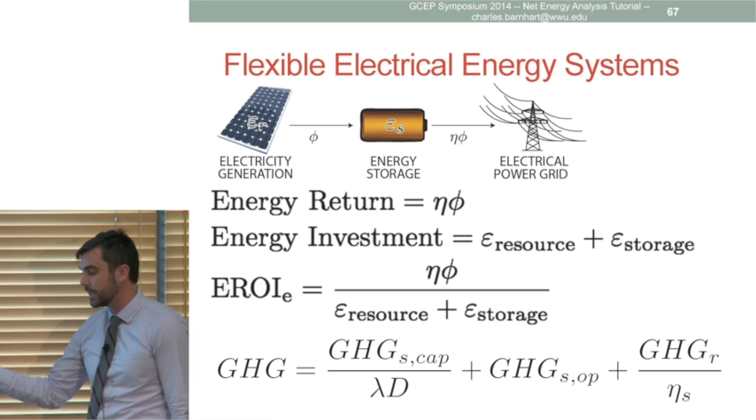All right, so this plots these different flexible generation pathways on an EROI basis on the x-axis, bigger is better, and a carbon efficiency basis, which is the inverse of carbon intensity. So this is how many kilowatt hours are generated per kilogram of CO2 chucked into the atmosphere. I plotted it in this funny way because I wanted bigger numbers to be better, and I wanted to look at 4 different quadrants that the plot can be divided into.

I quartered the plot by looking at the US power grid average. And so the US power grid average has an EROI of about 18. This is looking at all the different resources that go into that grid supply mix. And then the carbon efficiency of the power grid. So pathways that have better carbon efficiency and higher EROI than the US power grid average we should employ today. Pathways that perform worse than the US power grid average we should think carefully about, probably avoid.

In this region, we're trading low carbon for less energy. I think that's a good trade. I'm personally more concerned with carbon than I am with energy use. And this region here, we're trading energy efficiency for high carbon emissions. So something like a coal power plant would be down here. Energy efficient, but less carbon efficiency than the power grid average.

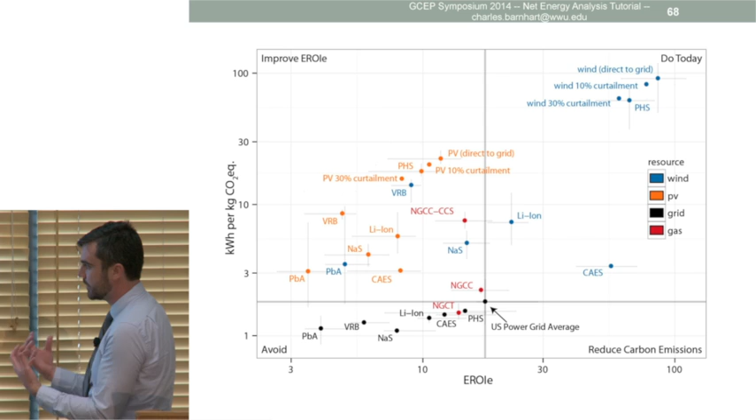This is what happens when we store electrons for the power grid. So technologies in black take electrons from the power grid and then put it back onto the power grid. Pumped hydro performs better than a natural gas combustion turbine, but all other technologies have an energy penalty and a carbon penalty when compared to the US power grid average. Unfortunately, lead-acid batteries have the lowest financial capital costs of any technology, so they're being used in places like Germany and California, but it is the absolute worst idea based on a carbon and energetic basis.

This is what happens when we store solar electrons. Here's PV direct to the power grid. This is what happens if we curtail PV at 10%. So if we have too much PV in the late afternoon and we just let it go, that might not be a bad idea, especially compared to trying to store it with lead-acid batteries. Storing PV with lithium-ion, pumped hydro, vanadium redox, these are good ideas, low-carbon pathways.

Wind looks like a dream. Wind direct to the grid is way up here. It's a factor of 50 less carbon intensive than the power grid, and it's about a factor of 5 more energetically efficient. Even curtailing wind at 30%, throwing away 30% of our wind, performs as well as storing it with a pumped hydro storage system.

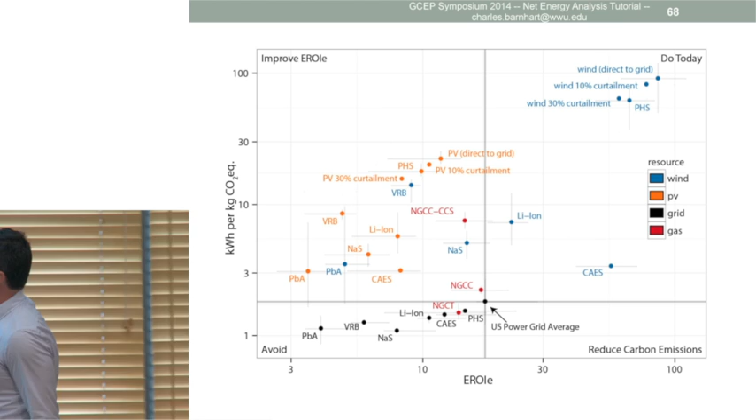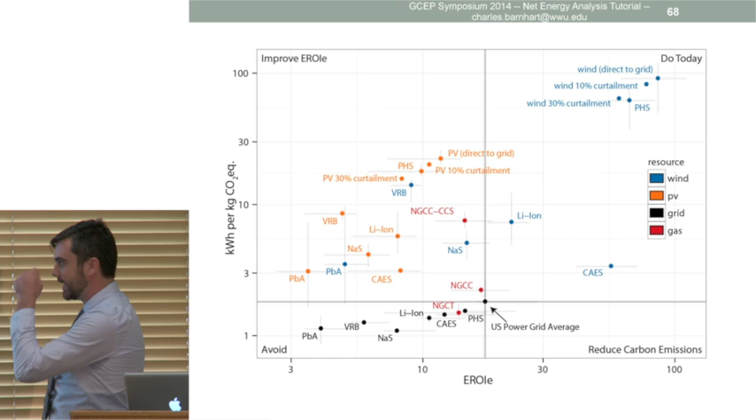Wind plus lithium-ion is still a super attractive flexible grid technology. It performs way better than US power grid average and totally trounces a natural gas peaker plant. Wind with a lead-acid battery is way over here. This is just ridiculous. I don't know what it'd be like, maybe driving a Tesla with 4 flat tires.

Yeah. What duration of storage? This is bulk storage, so 12 hours to 24 hours, or 6 to 24 hours. These are all bulk. This is not frequency regulation. This is shifting electron use from midday to afternoon or from night to day. Did you look at cost? No.

I only have 5 minutes left, so I want to pour through some of this last paper that Mick, Adam, and Sally and I wrote, trying to promote the idea of net energy analysis for a societal use. So this paper came out in Nature Climate Change this summer, and we titled it A Better Currency for Investing in a Sustainable Energy Future. And we had five points why policy analysts should look at this. It provides a second way to value energy resources beyond just the financial. That last example shows that clearly. Lead-acid batteries are cheap, but they're not good from a carbon and energy perspective.

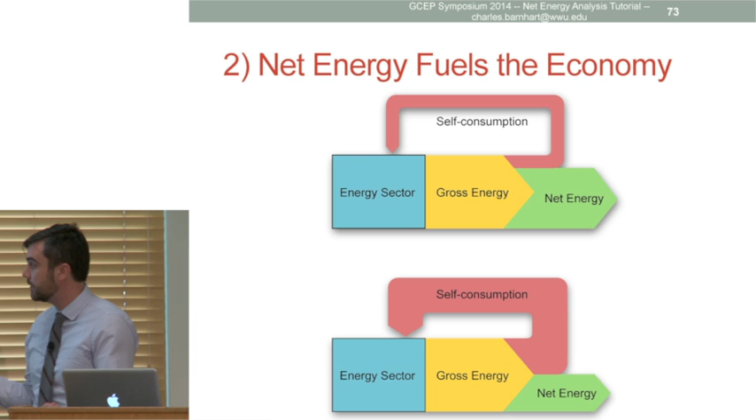Net energy fuels the economy. The more net energy available, the less that's being consumed by the energy sector itself, the more energy is available for purposes in society. Third point, we can assess environmental impacts. So Adam's done careful work looking at net energy ratios and net external ratios. One is more societal implications, one has more environmental implications. If we look at pure net energy ratios, especially with fossil fuel intense resources, then we can use that as a proxy for environmental change.

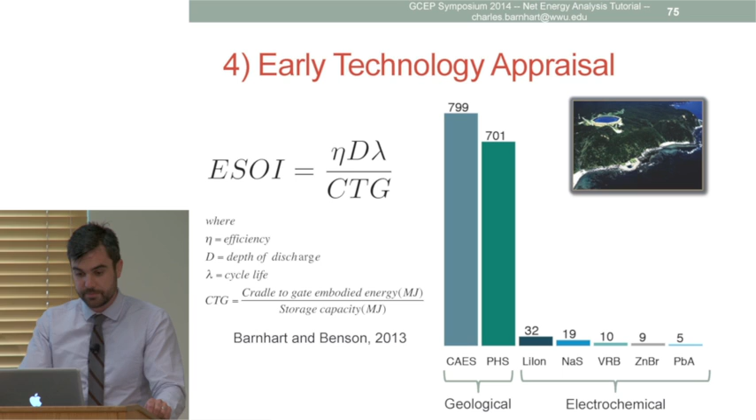Fourth point, early technological appraisal. I go to a lot of storage conferences. They often say that we are storage technology agnostic. I'm not. I'm storage technology prejudiced in the extreme. They do not compete with one another on an energy and carbon basis, and we need to improve electrochemical storage technologies by improving their cycle life foremost and their efficiency second. And Zhenan Bao and Yi Cui are making great strides towards this end.

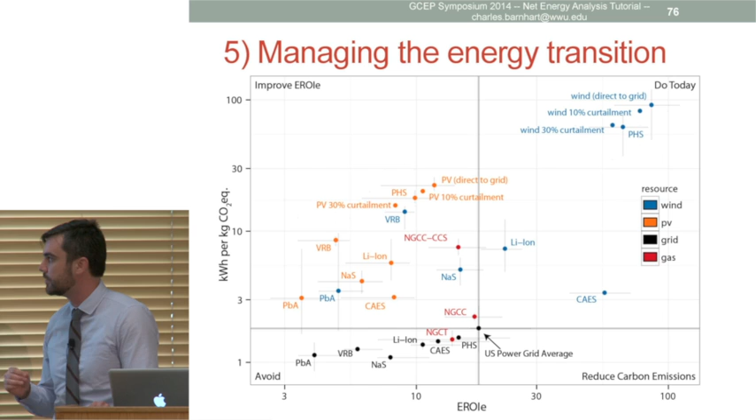Finally, managing the energy transition. We don't have to go about it in this financial or organic fashion that we've done throughout the last 200, 300 years. We can perform analysis now before we make decisions and hopefully guide some of these decisions. Mick Dale made a nice analogy for net energy analysis. He said it's another important indicator on how society could be conducted.

And so a plane has both an altimeter and a speedometer. These are the two most important things. And if we're just doing financial analysis, it's just flying a plane without the speedometer, for example. So as many indicators as we can get, that's the better. Maybe we can have one for water, CO2, selenium, mercury. This is why this is important.